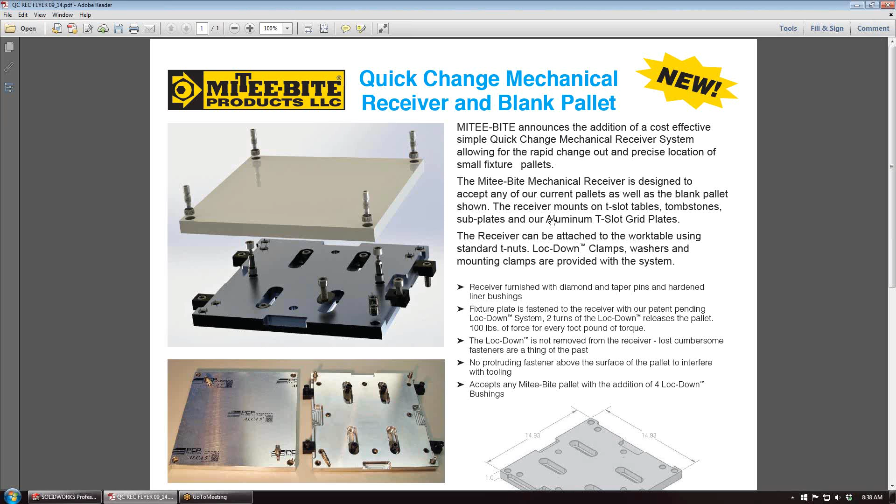Today we're going to talk about the Mitee-Bite Quick Change Mechanical Receiver and Blank Pallet. We're going to look at part numbers 46500, which is the receiver, and part number 46525, which is the Quick Change Blank Pallet. And what we'll do is we'll go into SolidWorks.

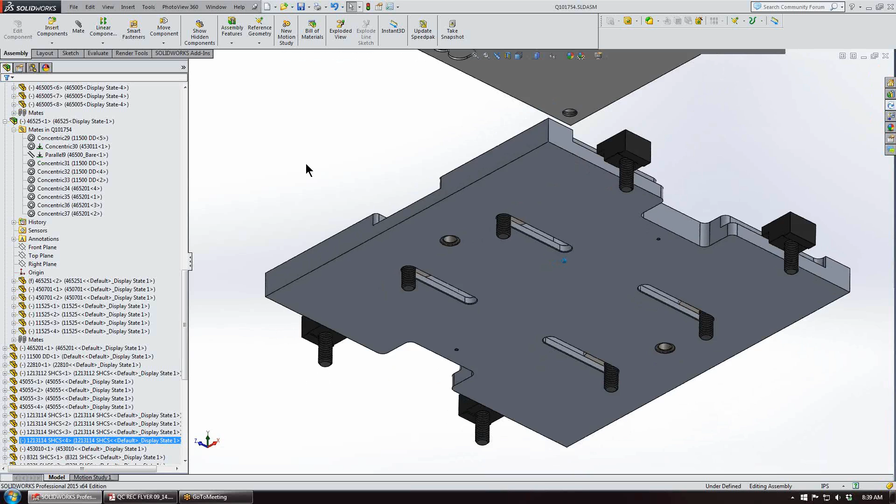I've already created just a simple mock assembly. What we have on the lower part is the receiver. The receiver has bushings on the backside installed for locating with our long length T-nut if needed. We also have diamond tapered pins on the upper surface, which mate up with bushings installed on the blank pallet.

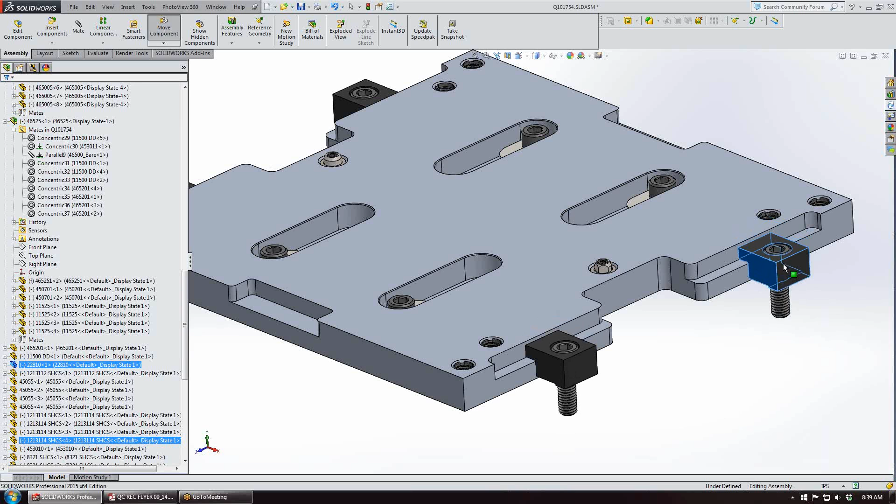For mounting the receiver, we have a couple options. We have some clamps that'll come down the side that can mount on your T-slot table or grid plate, and the kit will come with these. We also have just some slots on the internal areas, this way you can also mount to your T-slot table or grid plate. It gives some flexibility for the receiver to be mounted.

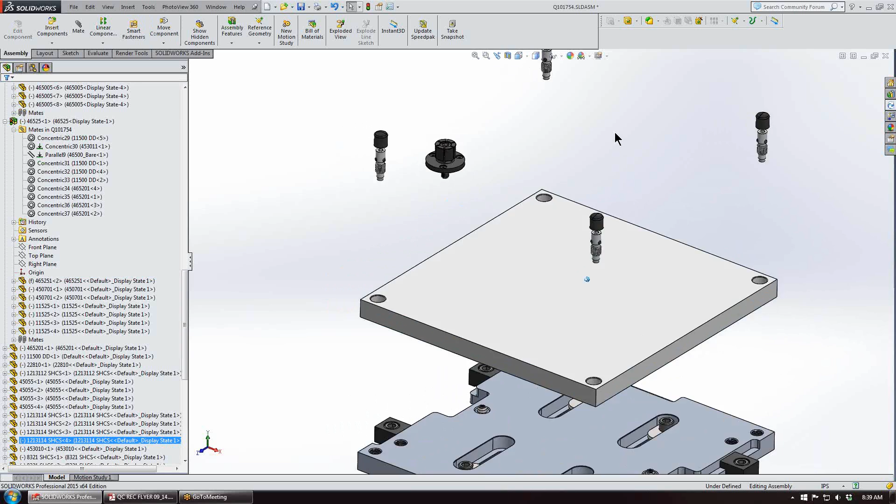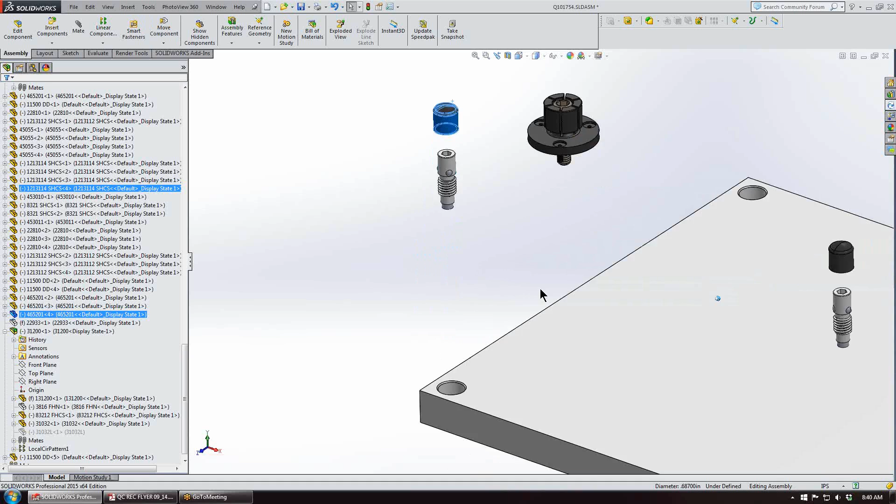And this here is the blank pallet. Then what we have here also are the Loc-Downs, which are key to the quick change aspect of this mechanical receiver. 2 turns counterclockwise of the Loc-Down will allow the plate to be removed. We also have some chip covers, some vinyl chip covers that get installed over the Loc-Downs once it's all in place, and we'll make that up later.

I'm just going to open up the Loc-Down for a little more detail. How this 1/2-13 Loc-Down works is as the Loc-Down is tightened up in place, it'll push down on this plunger and depress it up into the Loc-Down, which in turn will protrude the 3 spheres.

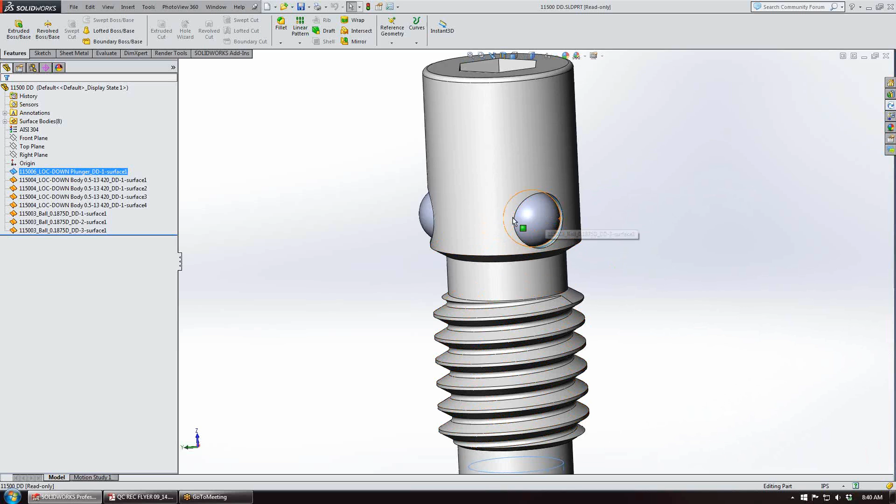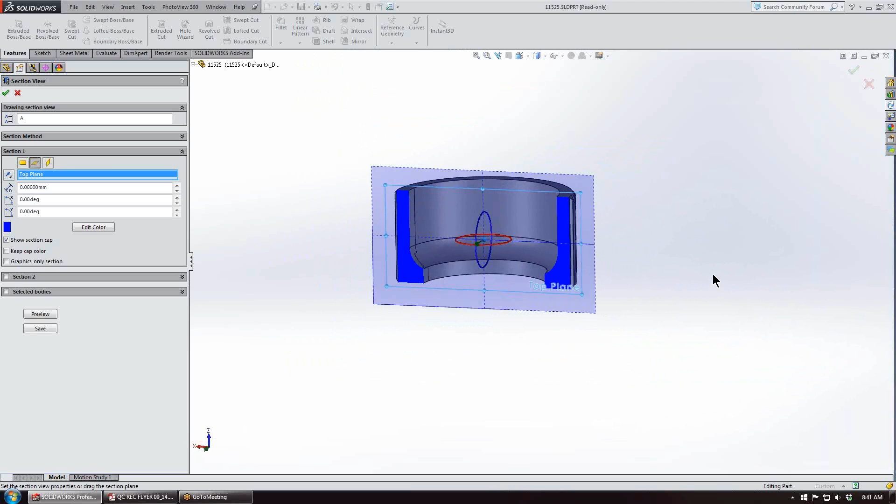These 3 spheres, as they protrude out and go back into the assembly, get captured on a bushing on the inside, and there's one on each corner of the blank pallet. We'll just do a quick cutaway view here. So the spheres will grab on this inside radius and pull the fixture plate down and locate it in the z-axis.

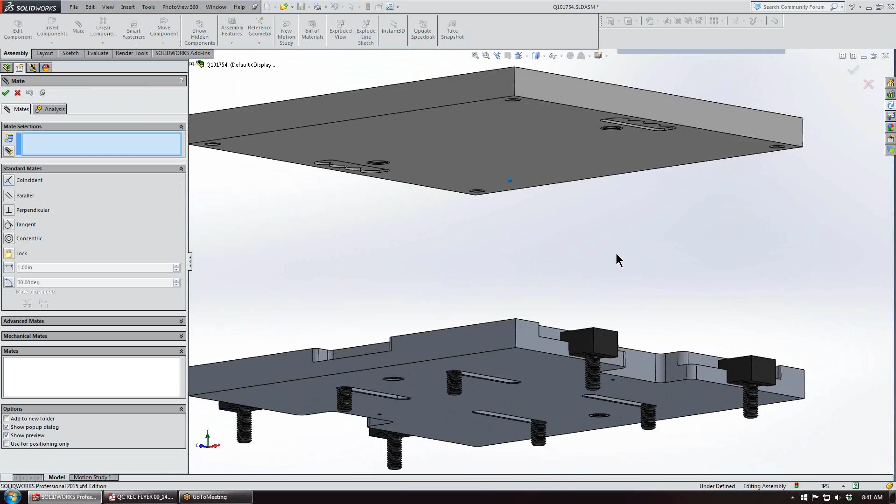Alright, what we'll do next is we're just going to mate up the blank palette to the receiver, and we'll just grab that cylindrical face on the diamond tapered pins, and then we'll actually grab the top surface. I've already added the concentric mates to that, so I'm just going to add a coincident mate to the top surface of the receiver and the underside of the blank palette, and we'll mate those up.

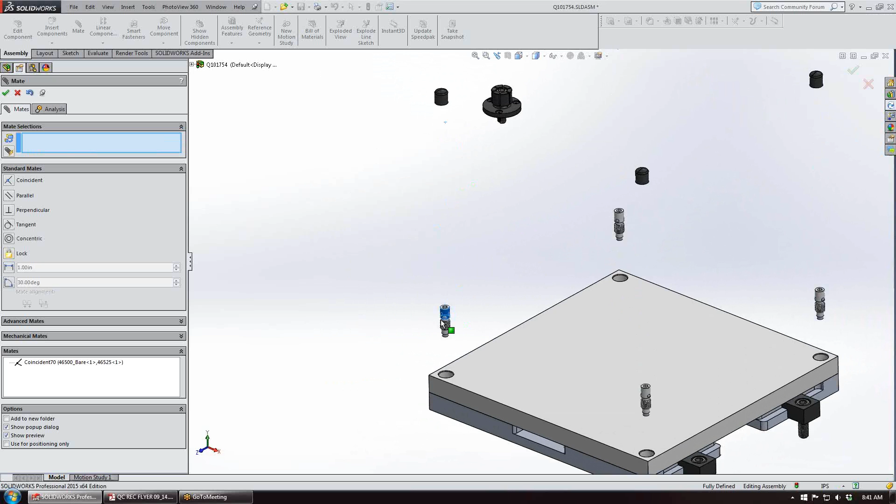Next, what we'll do is we'll bring the lockdowns in place, and we'll just slide them down. What I'll do is I'll make the blank palette transparent so we can kind of see inside and just look at the interaction. We'll look straight on that surface, and what you can see is the bushing on the inside, which is transparent.

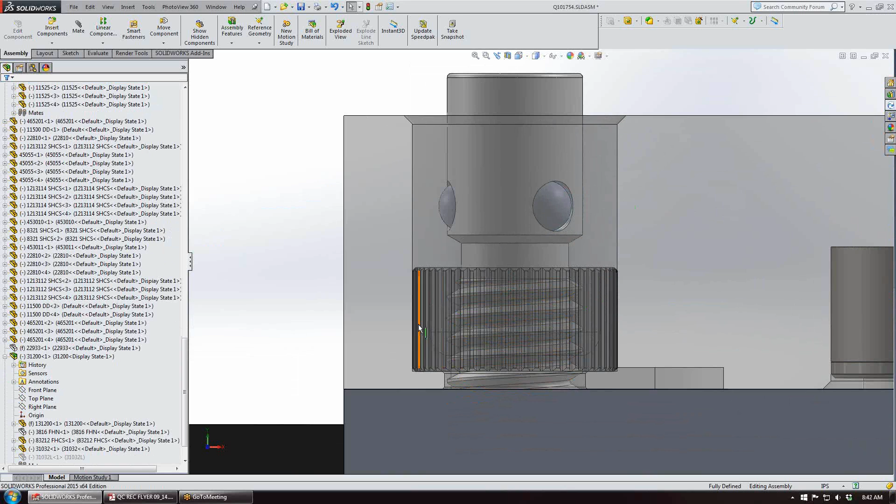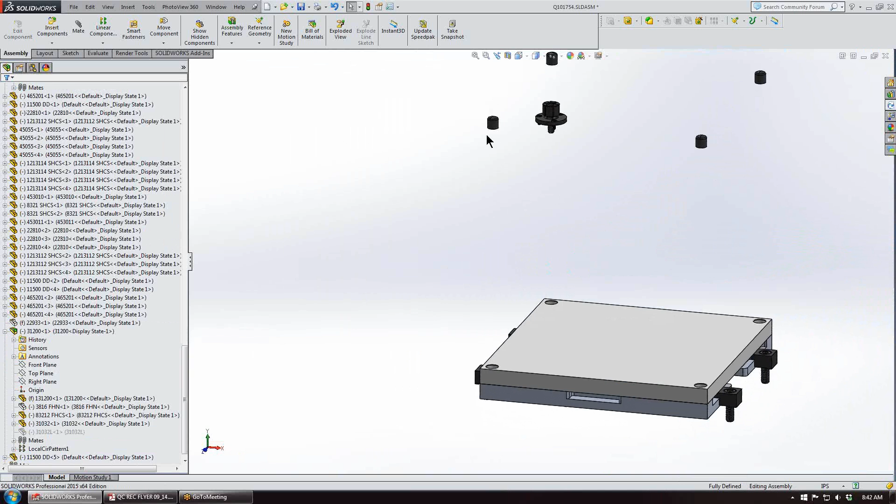As the lockdown is tightened up, as we noted, the spheres will protrude out. They'll get captured in that inside radius on the bushing and pull your plate down. What I'll do next is I'll just remove transparency from that plate, and then we'll bring our chip covers down, and they just get pushed into place in the holes in the blank palette.

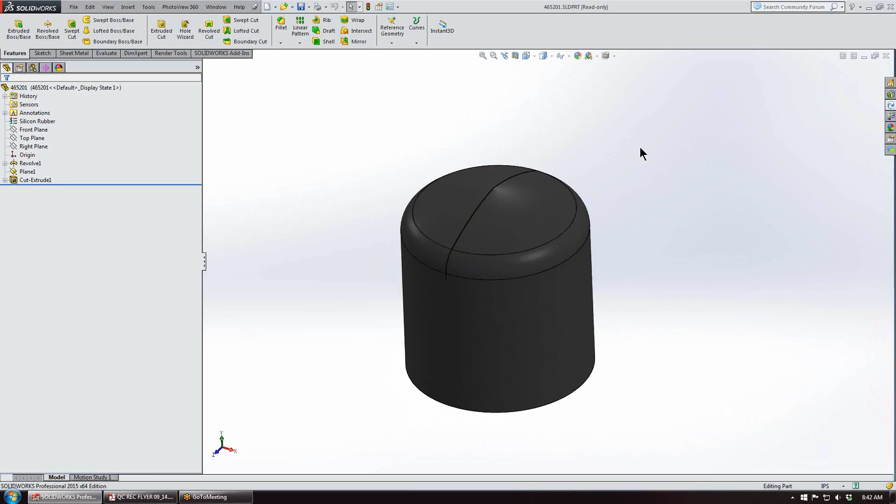And what we've done is we've actually added a slot, and we'll open up this part. We've added a slot in this silicone rubber piece just for access with your hex key to the lockdown, just for ease of keeping the chips out and easy access with that hex key.

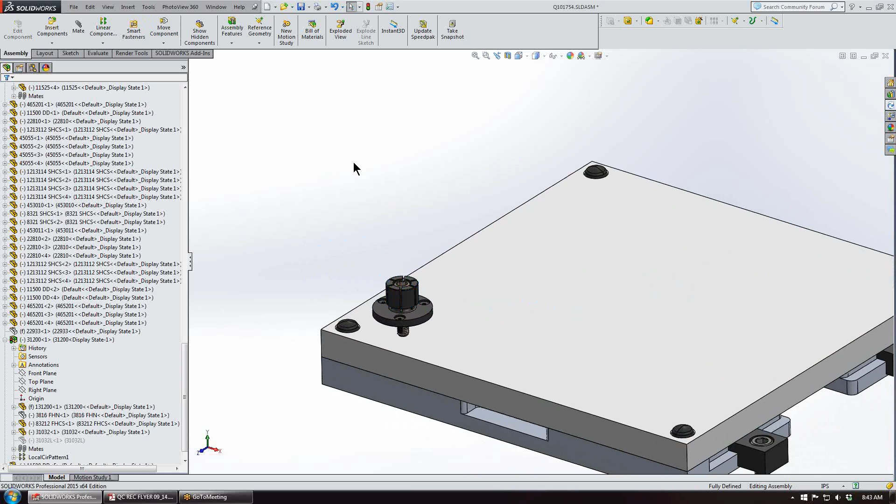And just one more item I wanted to point out was just the blank palette itself. We have this 15-inch square surface. Just one of the clamps that we could use on this is the Mighty Byte ID expansion clamp, and I'm just going to mate this up to the top face.

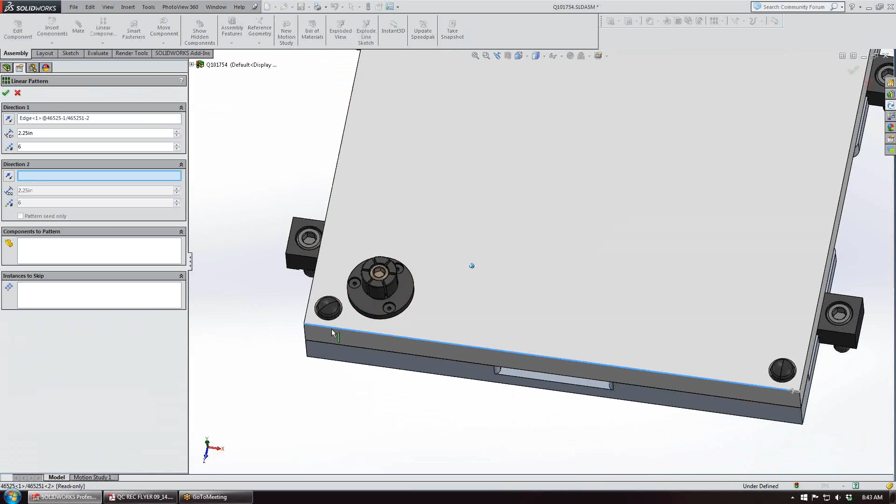And what you can do is on this blank palette, you can just populate the entire surface of this with these or a number of other Mighty Byte clamps. So I'm just going to do a quick linear pattern. We'll flip the direction of that edge. We'll choose this as edge 2.

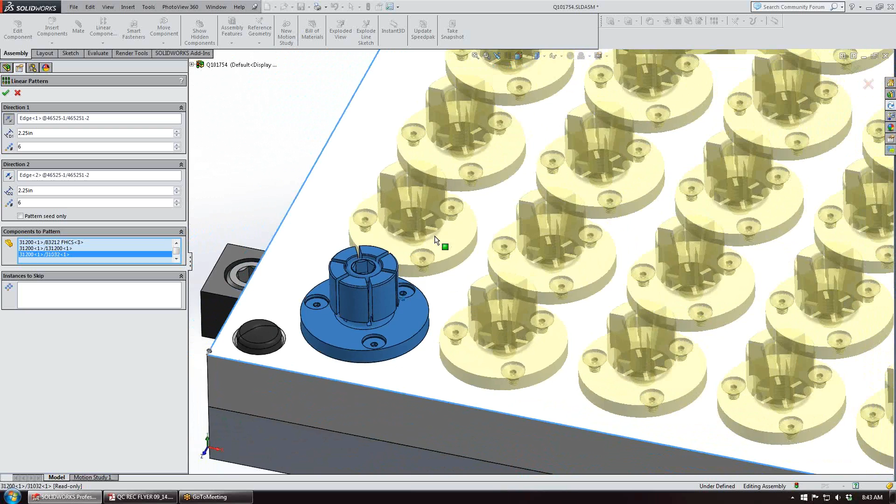That direction looks okay. As far as components go, we're just going to grab the mounting screws, the clamp, and the tapered screw. And as we bring this out, it looks like we already have a pattern in place. Looks like we have 2 rows of 6 going in the x-axis and 6 rows in the z-axis. I believe the spacing is 2 1/4. We'll just accept this.

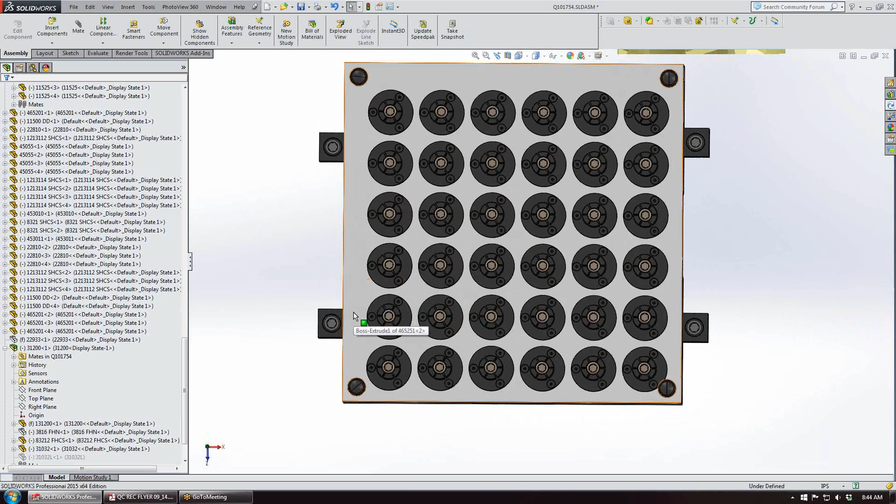And you can fit a lot of parts on this pallet just for high density work holding. I'm just going to look straight on this. I'm just going to slide this over just to center a little bit more. And this is the quick change mechanical receiver from Mitee-Bite.